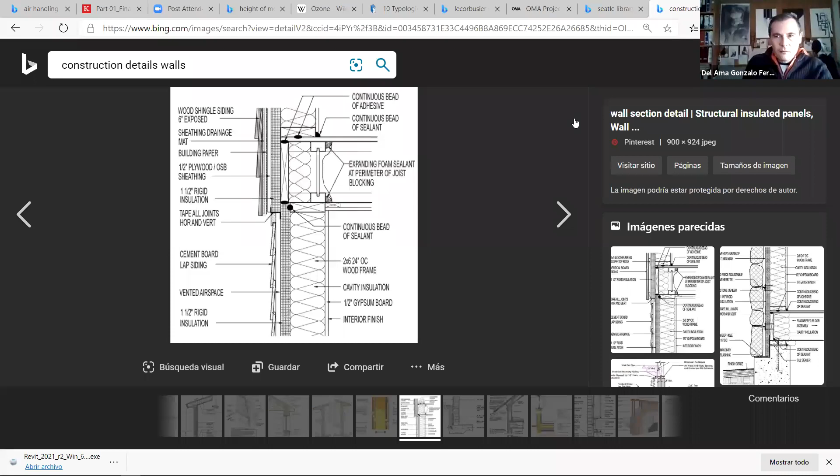You can find a lot of information, and most of the details that you can find on the internet are taken from this book, the Builder's Guide. It's called Climates.

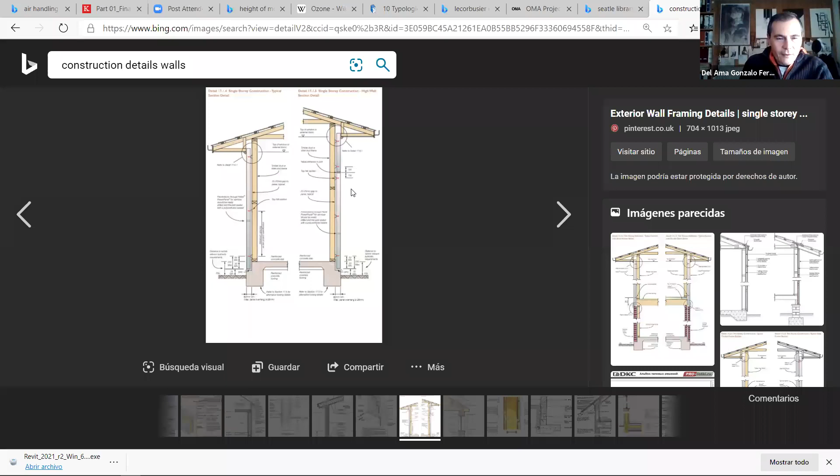Okay, but look at this. You can find a lot of examples, hand drawings, computer drawings. And if you have any questions, let me know, because this is how you will learn.

If you're working with your own building, you have to decide. It's your decision, not mine. It's not even your design instructor's decision what kind of materials you want to work with. It's up to you. So if you want to work with brick, that's fine. If you want to work with natural stone, that's fine. Wood, concrete, whatever. Then based on that decision, we need to analyze and calculate the U value and the R value and all that.

But especially the interior and the exterior finishes, they are up to you. So we are not making that decision for you.

Okay, so first we have the system. This is the system that we have studied, with rafters and thermal insulation in the middle. So those are the rafters. This is the kind of detail that we have studied on the first assignment, okay, that's fine.

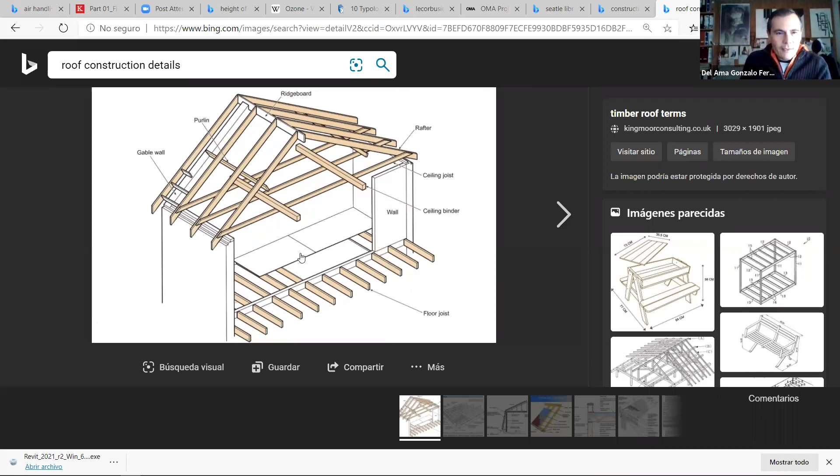Here we have the structural elements, and we need thermal insulation between these two structural elements, and then we need the internal finish and an external finish that usually we have shingles outside. So first we have to decide the system: do we want this, or do we want a flat roof?

If we want a flat roof, we have other options. We can work with concrete. This is more of a commercial building detail, so we have a lot of layers, but we always have a structural element, then thermal insulation, and then an external finish.

So if you have flat roofs, things can be different, because with flat roofs we have to get rid of water, and getting rid of water in flat roofs is complicated.

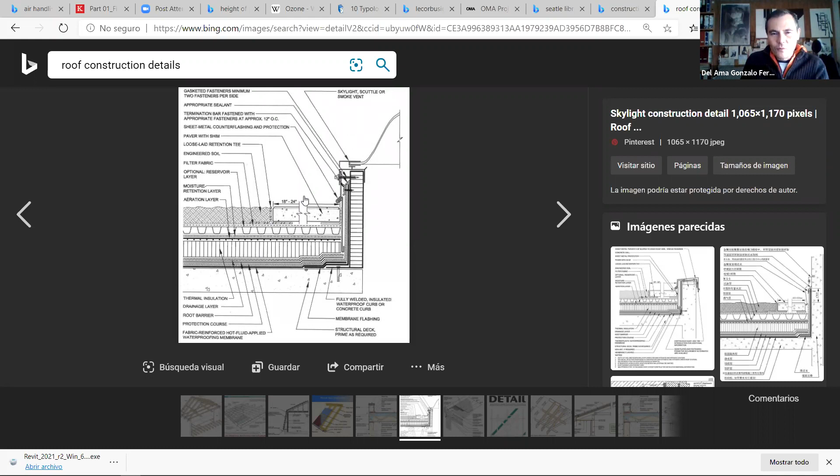But there are other options. Basically, if we are working with the same kind of detail, the roof is the same detail. We only need roof shingles, which can be metallic, ceramic, asphalt, whatever, but we need roof shingles. Then we need another rigid insulation, and then we need the thermal insulation where the rafter is, and then we need a gypsum board or interior finish.

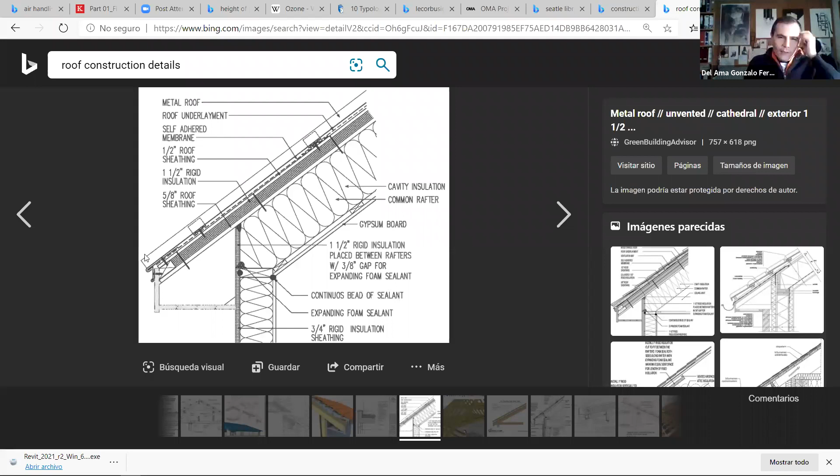Details of the roof and wall are quite similar if we're working with this kind of construction, or with other construction methods. If we're working with this framing, the details of walls and roofs differ slightly. This is a flat roof in which we have the beams or rafters, and then we have a board here.

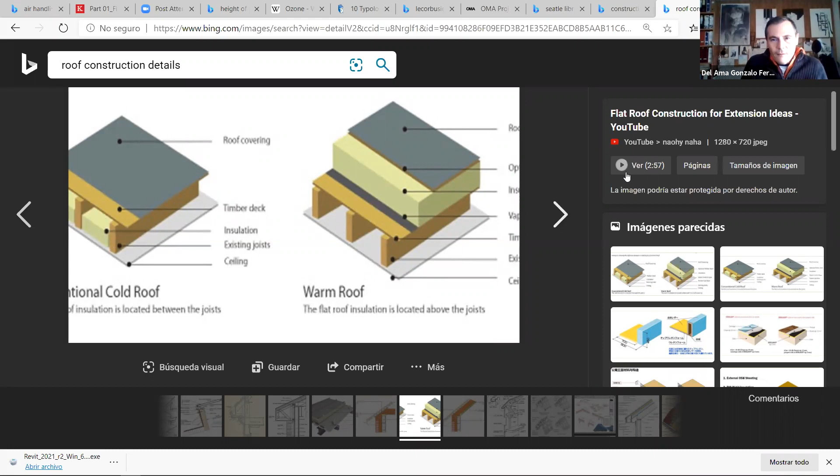We have thermal insulation above, and here we have thermal insulation between the rafters. My advice is that you should have thermal insulation between the rafters, and then add extra thermal insulation above to reduce the U value. As you can see, you have a lot of information here with nice drawings.

There's another option. If you don't want to do it by hand or using Revit, you can copy one of these and paste it on your project. If it fits your project, I will accept it. Here you have a lot of information, names, and nice hatches. So do your research, but it's always the same.

We have thermal insulation between rafters, then extra thermal insulation outdoors, and then siding or shingles. We can have air cavities or not, so it depends. But 80% of residential buildings have the same kind of construction detail.

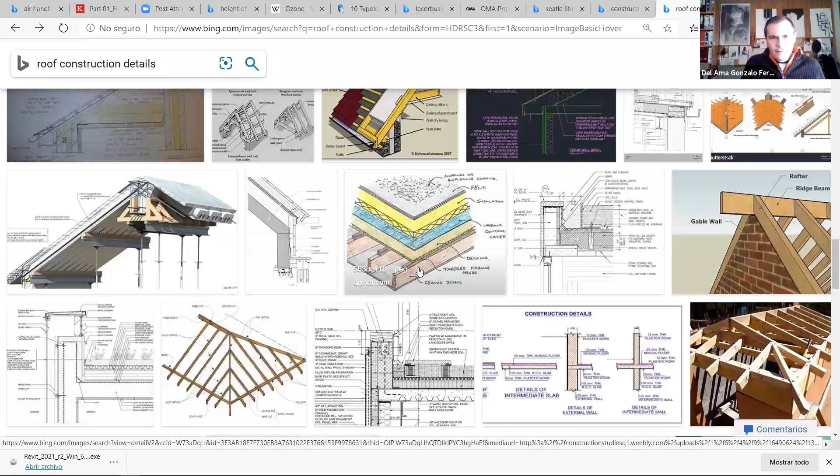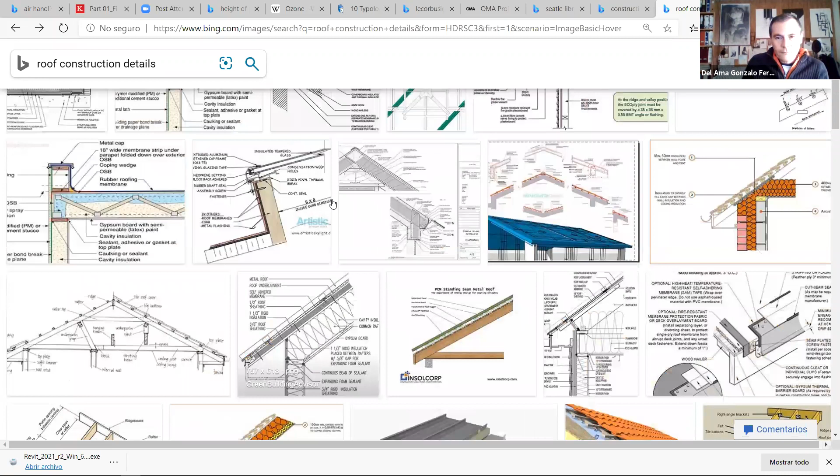When it comes to details, you can either use this Builder's Guide to Cold Climates. That's good because all the details in that book are correct. On the internet we can find good things, or things that are not as good as we expect. That's why I'm here, to help you decide and select the right detail.

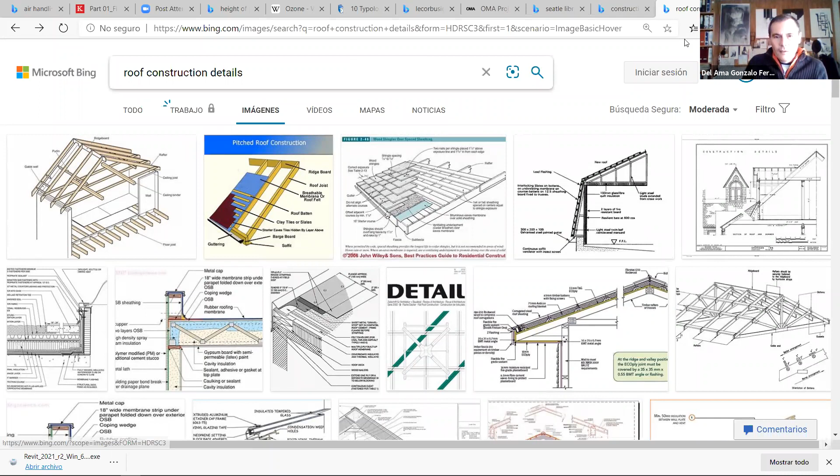So I was explaining part one: the first sketches of walls, roof, and basement. Again, the first sketch, then we will change it, but we have to start analyzing something, and it can be right or wrong. If it's wrong, we will change it. Doesn't matter. Finally, we need to calculate the U values of walls, roof, floors, basement, and windows.

So for windows, I told you that we might need to start this exercise with a window that is not a high performance window. If we want to do this... this is the Fisher house.

This is a detail taken from a basement. We've looked at walls and roofs, and now we look at the basement. I think it's a good option to have an insulated basement. There's an option to have thermal insulation only up to 1, 2, or 3 feet, but I think continuing this external rigid insulation is the best option for a basement. Then we have other things you probably don't know yet, like those drains, which we'll talk about later or in other courses.

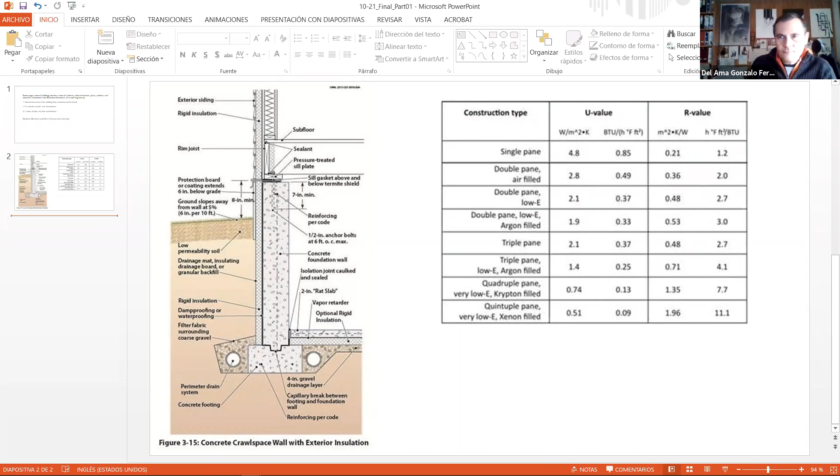So the U values of walls, roof, and windows. Yeah, let's move on.

For the windows, you can use that catalog. And for the roofs and walls, you can use something below R value 50, R50, and then we will move to something better to calculate the improvements, and then you will have to submit a PowerPoint file on Canvas by the due date, which is October 21st at 11 p.m.

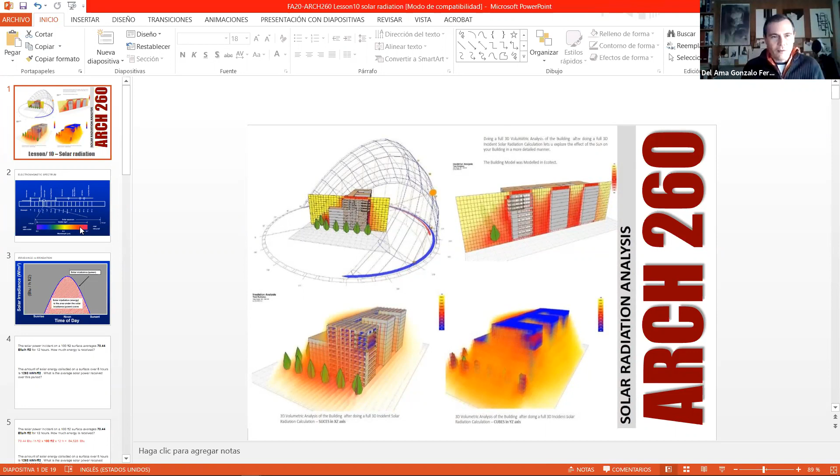I want to give a lesson on solar radiation analysis. Why? Because the sun is the source of energy that we have on Earth. It's for free, every day it rises and every day it sets. But we have to understand what solar radiation is, because it's probably the most important external source that we have. We have wind, we have water, but sun is probably the most important thing when it comes to the energy efficiency of the building.

So first we need to understand what solar radiation is. It's complicated, we're not physicists, we're not studying physics, but we have to understand that within the electromagnetic spectrum, the spectrum is a graphic that relates wave parameters to energy parameters. Here we are relating wavelength, which is a wave length, and we are relating the energy. It can be either power or energy or kilopower. So when we relate these two concepts, then we have a spectrum.

The electromagnetic spectrum is everything that we have around us and we don't see. What we can see is just the visible light spectrum, this narrow band of wavelengths. We can see from this wavelength until this one - this is the violet, and this is the red one. So we can see 7 colors.

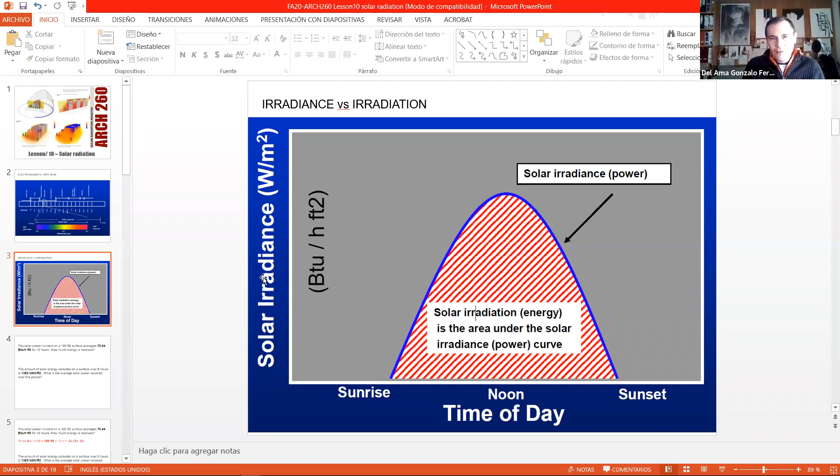This is just an exercise, so we're going to solve this—something I'm going to post as a test. Let me write it down. I'm going to post a test to make you calculate, or turn power into energy, or irradiance into solar irradiation.

Let's solve this. The solar power—so this is power, which means irradiance—incident on a 100 square foot surface. We have a square, 100 square feet, 10 by 10. The solar irradiance incident on that surface averages 70.44 BTU per hour per square foot. These are power units.

For 12 hours, so this is time. How much energy is received? Energy is power times time. So what is the energy? The units are BTU. What is the power? The power is 70.44 BTU per hour per square foot.

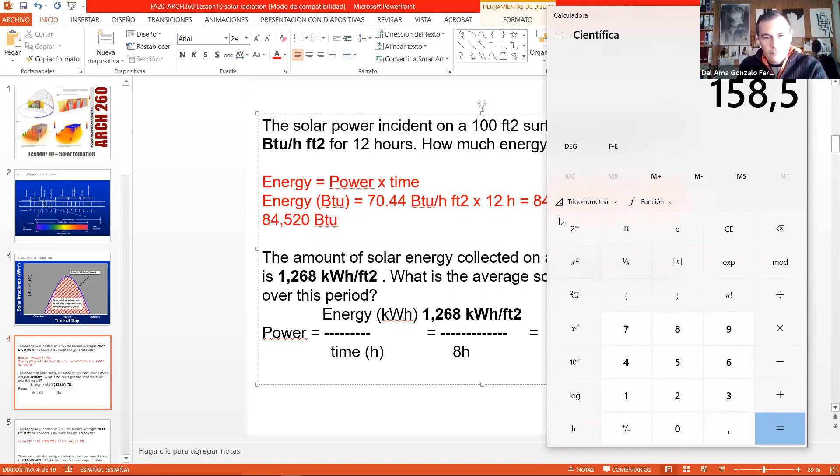Units, kilowatts per feet square. Okay, so here we don't have any information about the area, so we cannot multiply times area. So the units, the final units are kilowatts divided by feet square, and kilowatt is a unit of power because we are asking for the power.

Okay, so I think I told you on the first lesson that I recorded back in August, that if I had to decide what you have to know after taking this course, that should be the difference between energy and power. So we are repeating this many times, and we will repeat this next semester when you are taking either solar design or if you are taking systems. We will be dealing with energy and power because it's very important to understand the difference between energy and power and how we can go from energy to power and from power to energy.

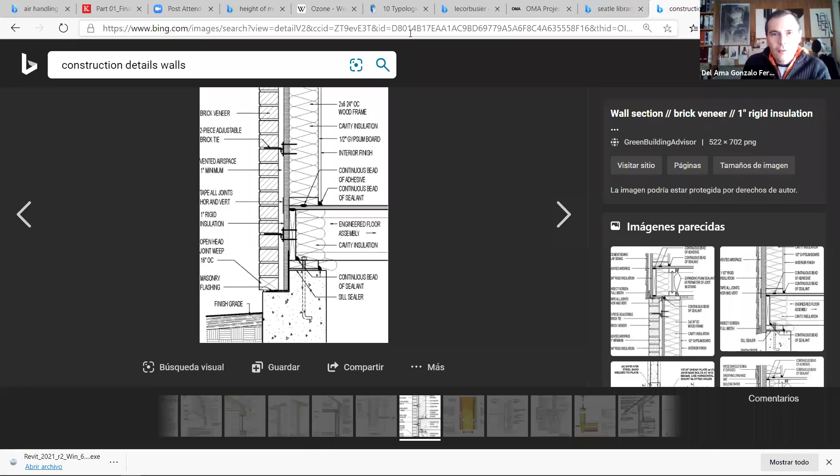So what's the thickness of this atmosphere? Well, so this thickness, it's around... well, that's a good question. So let's find out, what's the thickness of the atmosphere? 60 miles. Okay, 60 miles.

So this is the thickness of the atmosphere. But where can we live?

The layer of the atmosphere in which we can live - can we live on top of Mount Everest? We can't. We can't live here on top of Mount Everest. What is the height of Mount Everest? 5.5 miles. And we can't live here because we don't have enough oxygen. We cannot breathe without oxygen here. Well, maybe we can breathe, but only for a few times.

So the thickness of the layer in which human beings can live, maybe it's 2 miles. Okay, so we can live in this narrow layer with air and other gases that we can breathe. Other than that, human beings cannot live there. Okay, so think about it.

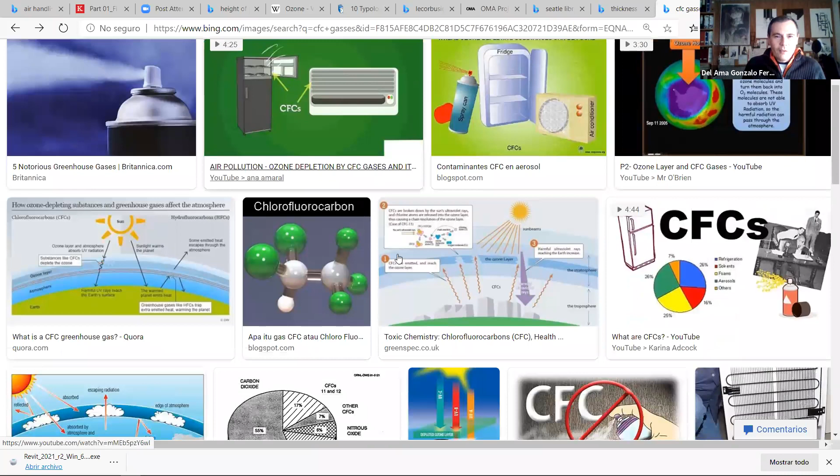So by releasing these kinds of gases to the atmosphere, they started causing trouble with this. There was this break or breach in the ozone layer, so the amount of ultraviolet radiation increased at the time.

What were the consequences? The hairspray was forbidden - I think it was a good idea. And secondly, these CFC gases in air conditioning systems were forbidden as well. Mechanical engineers had to come up with other gases that are less harmful to the atmosphere. But that happened in the 80s.

Now we have other issues, like global warming. Well, everything is related, but why is that happening? Well, first we have this ozone - we need this to absorb part of the ultraviolet solar radiation.

Okay, that's fine. Then we need clouds. So when we have clouds, the clouds are water vapor - something natural - and it absorbs part of the infrared solar radiation. So by having water vapor in the atmosphere, sometimes we see these water vapors as clouds or fog, so we can see that.

But even if we don't realize that there is water vapor, there is, and it absorbs part of this infrared radiation. If we didn't have water vapor, a lot of infrared radiation would end up hitting the Earth's surface, and that wouldn't be good.

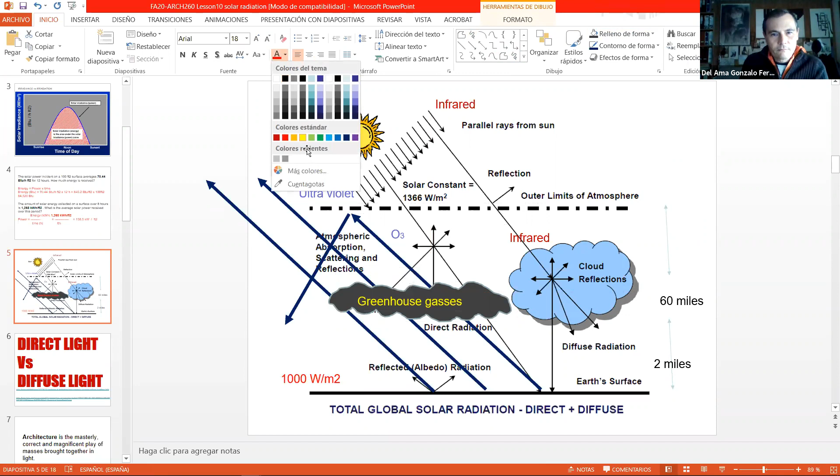These greenhouse gases are good because they help us. They are responsible for reflecting part of this albedo. We need a certain amount of these greenhouse gases so that radiation is reflected back, and the temperature is quite good.

But if we increase the proportion of these greenhouse gases, then a lot of radiation will be re-radiated here. This is what's going on now, and this is global warming. Naturally we wouldn't have this amount of greenhouse gases in the atmosphere, we have only the right amount. But if we increase this proportion, this energy is not released to the atmosphere, it's re-radiated, and then we have global warming.

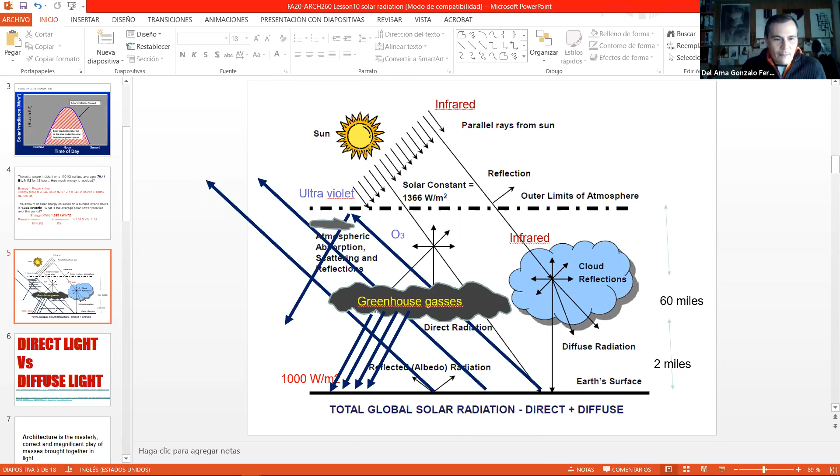Does it happen? It happens. I can show you a picture of where I live, where I used to live when I was in Spain. There you go. You can see that especially in big cities, we have this. What is this? Well, it's a concentration of these greenhouse gases, especially when the wind is not moving, when it doesn't rain, when the heating systems are on.

There are a lot of cars here, so we increase the proportion of these greenhouse gases. This is something we can see if we walk out of the city and look at it from afar - we can see that something's going on. So this is what's happening. And can we prevent this from happening?

Of course we can. As human beings, we can use less fossil fuels. By burning fossil fuels, we're increasing the concentration of greenhouse gases in the atmosphere. But as architects, we have a huge responsibility, because they say that 40%, so let me copy this.

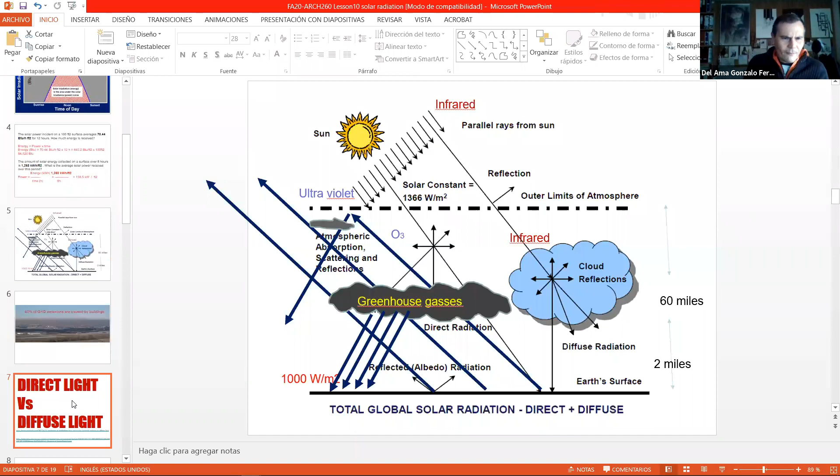But those are concerns that we need to be aware of. I want to point out other things that affect architects, and probably not other people, maybe artists or people who take pictures, that especially affect architects: the quality of light. We are talking about light or solar radiation from the thermal or energy point of view, but we have other points of view, and they are relevant to architects.

Okay, I'm going to paste this on the browser, because I was preparing something about this, and I found this website, ArchDaily. It's a good one, you can look at a lot of projects. They have products you can download, they have news, and you can upload your own projects if you are proud of them and they are good enough, they will be posted here. I found these interesting articles on 10 typologies of daylighting, from expressive dynamic patterns to diffuse light. Ten typologies, why ten? Well, the number ten is cool, that's why everybody has ten commandments and ten of everything. We have ten typologies of daylighting.

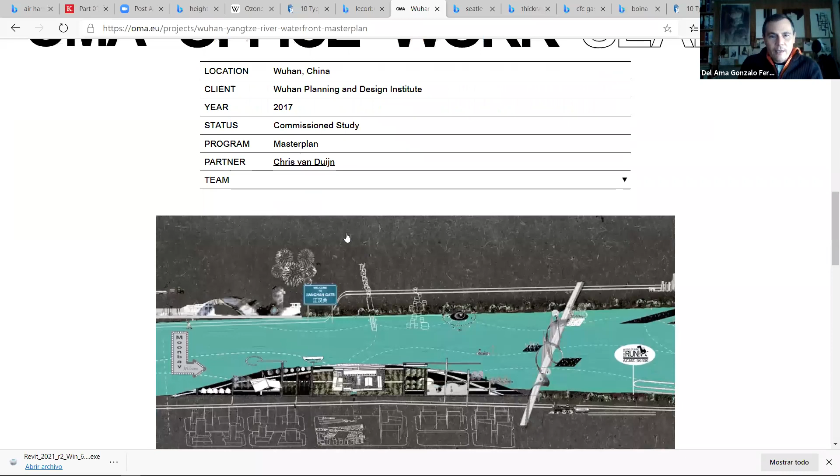You have first a nice picture, so this is what the cover page is. Look at this presentation, if you want to present your work what do you need? The best picture on the cover page. Or if you are designing a website, you need the best picture here. And then you have information, the location, interesting, the client, the year, whatever. Then you have other pictures that maybe are not as relevant as those, but the best picture is up front.

Beautiful. Okay, but we're not here to, well, we can.

Who's behind this OMA office? His name is Rem Koolhaas. The guy. Well, when I was a student, he was like this, but I think nowadays he has lost a lot of weight. Anyway, Rem Koolhaas is probably the most, in Europe, everybody's crazy about this. So every single European architecture student wants to work for that firm, even for free. He's in the Netherlands, and there are a lot of architects that go there asking, please, can you hire me for a year or 3 months or whatever? I don't want to get paid, but I want to work for you. And he says, okay, sure, you can go ahead. Anyway, a great architect and an interesting guy.

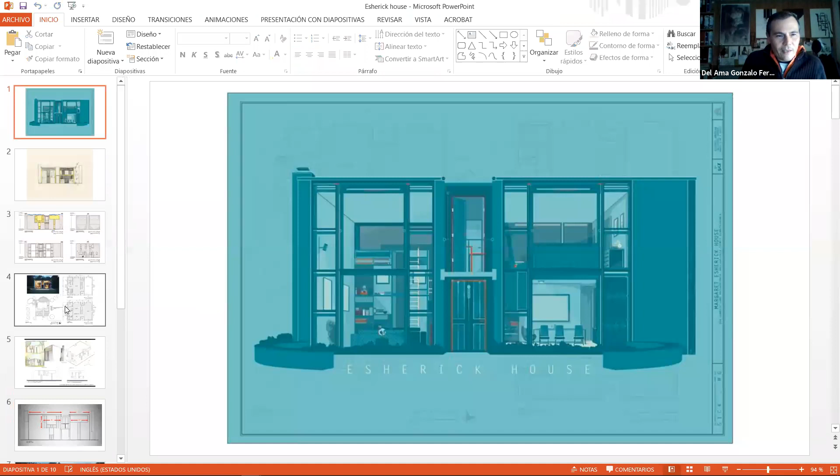Well, interesting. If you look at this guy, Libeskind. There's a museum in Berlin. So his option is this kind of openings. They are not windows, they are like cracks in this volume. Why? Well, we need to know about this museum, what the idea behind it is. But I think he has decided on this kind of light.

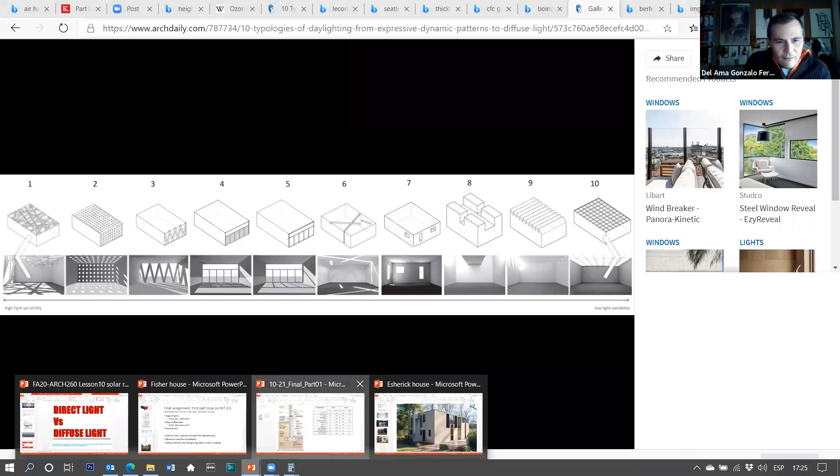And if you don't have enough, I want to show you this. Okay, this was my teacher. Well, this is my teacher's work. Let me see if he has a picture. Yes, this guy. Huh. What are you laughing at? Anyway, he used to be my teacher, and it's interesting because he's making the most of this. He's decided what kind of light he wants in that space, and then he does it.

I think he literally translates the options that we have seen here. In this picture I'm showing you, it's the first option. They have this dramatic daylight that is changing throughout the day in that space. This is a lobby, so I think that goes well for a lobby. But in other buildings, we might need something different.

Let me see. Okay, for example, this one. If you are designing a sports facility, you want kind of a diffuse light. You don't need this dramatic light, because if you are playing basketball, you don't need contrast between lights and shadows, because it's disturbing. So you will need that kind of diffuse light. And I think he has a sports facility.

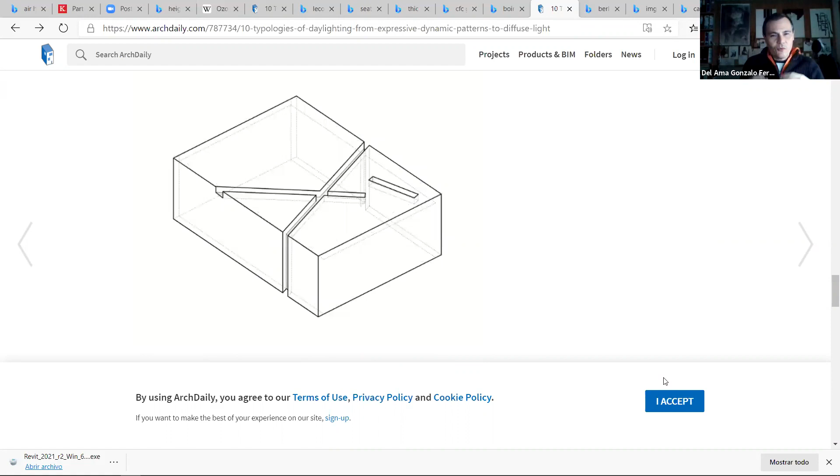Once we have made our decision about the kind of light, the quality of light we are using, then we can start calculating the thermal and energy parameters of light. But we have to connect our idea to the energy performance of the building.

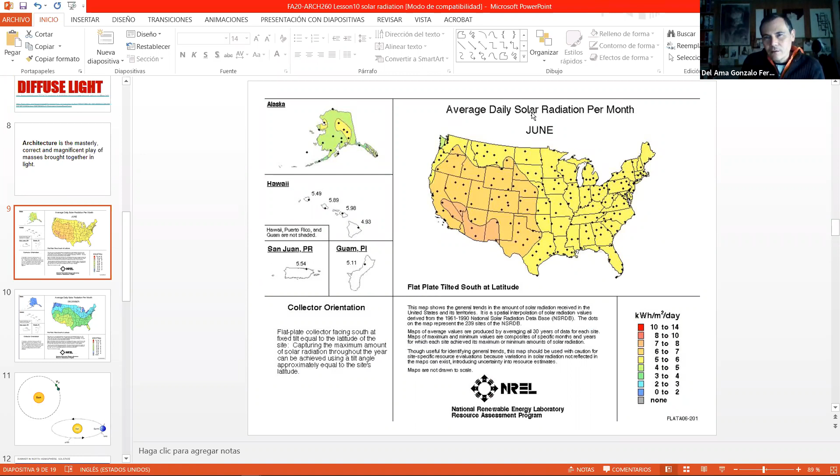By looking at this data, we can understand where we are. And when we understand where we are and the use of our building, then we can make a decision about the quality of light we need.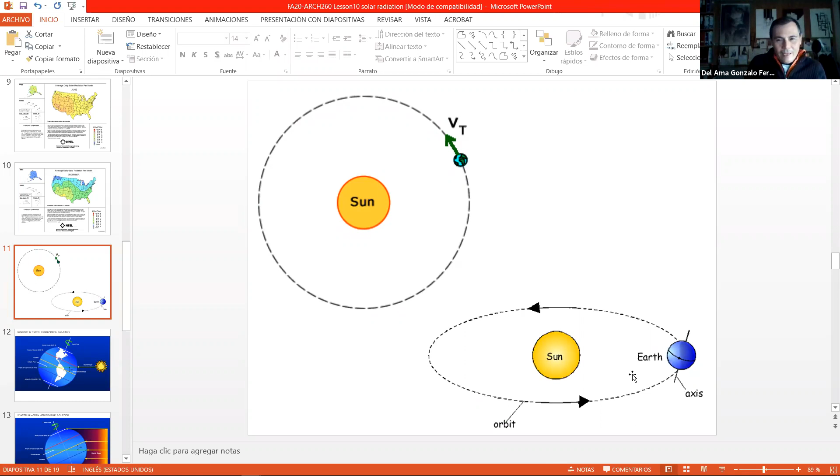What makes the difference is the angle. This is what we have to understand today. If this is the orbit in which the earth is revolving around the sun, this horizontal plane, the north-to-south angle, is tilted here, and this angle is 23.5 degrees.

Okay, so this is what we call the solar declination or the ecliptic angle. By the way, the ecliptic is this plane here, so this horizontal plane is the ecliptic, the plane in which the earth is moving around the sun.

This is not parallel to the equator. So this is the equator, and we have this angle of 23.5 degrees. Okay, so we need to know that.

And by the way, this angle, I think, is moving very little every 10,000 years, so we don't notice that in our life. But in millions of years, the earth will be upside down, and I don't know what will happen. But this is not something we can control. We can control the greenhouse gas emissions, but we can't control the tilt of this axis.

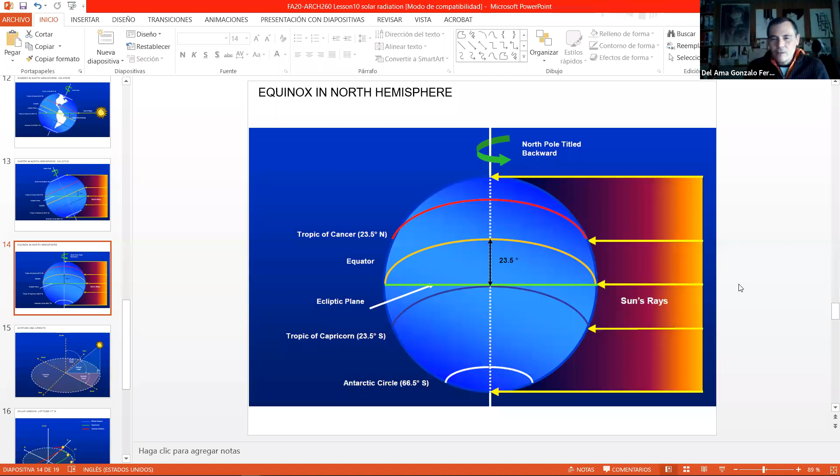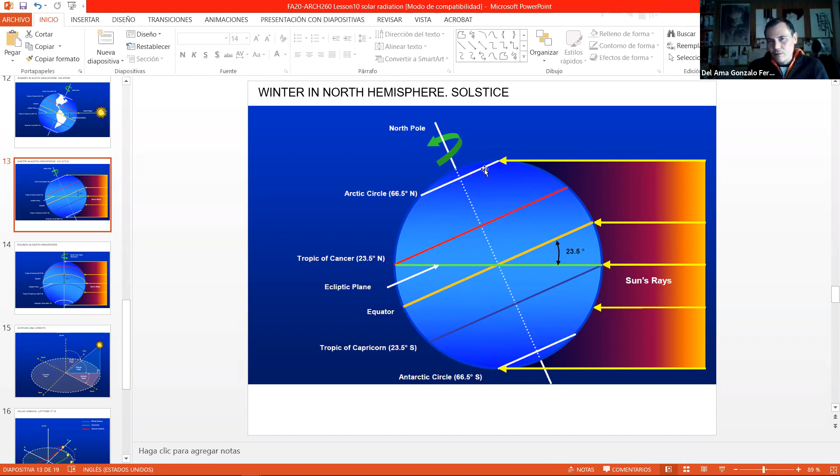There is a moment in which we have the same amount of solar radiation on the north and south hemispheres - this is the equinox. That happens on March 21st and September 21st. The solstice happens on December 21st, which is winter in the north, and on June 21st, which is summer in the north.

And then we need to know the azimuth. The azimuth is the angle between this north to south line. The altitude angle is the angle of the sun on the sky.

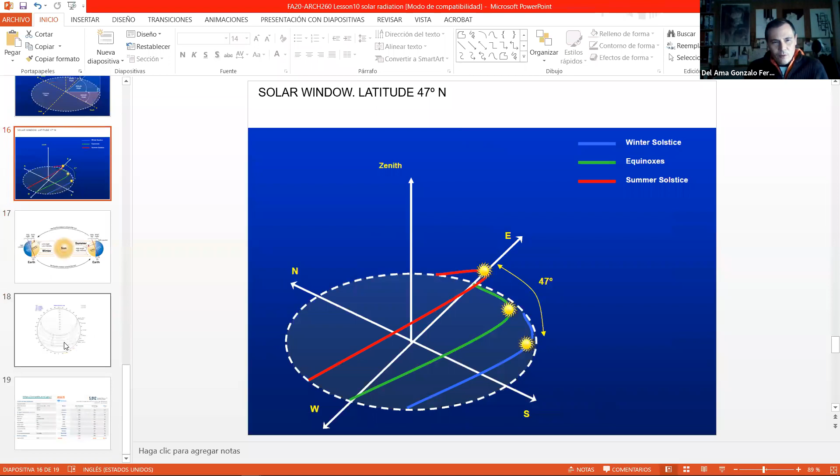If we look at this, this is the plan. Here we can see - I think I showed you that in Revit last week - how in summer we have this sun path, and in winter we have this sun path.

Only on September 21st or March 21st does the sun rise in the east and set in the west. In summer, the sun rises in the northeast and sets in the northwest. In winter, the sun rises in the southeast and sets in the southwest.

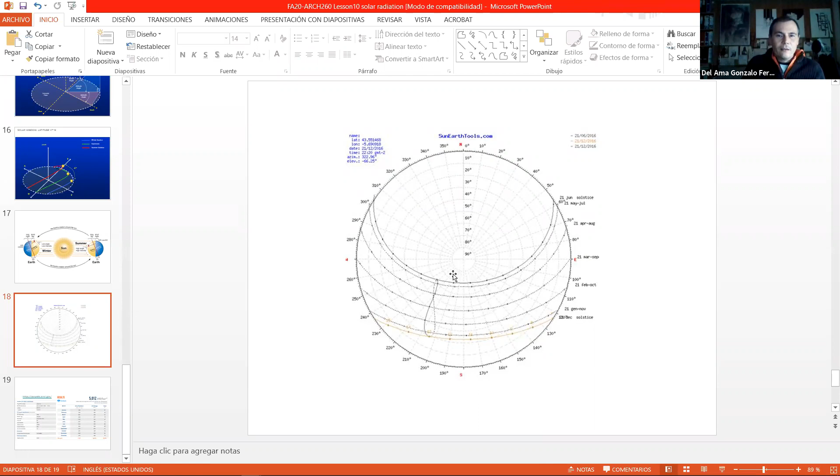That's important, but now we have software, so we don't have to worry about this - we can just model our building with Revit or SketchUp or whatever, and say, what's the daylight on February 3rd? Click, and you have the sun path and all the sunlight on that specific date at a specific location. That's great. And finally, we have PV Watts.

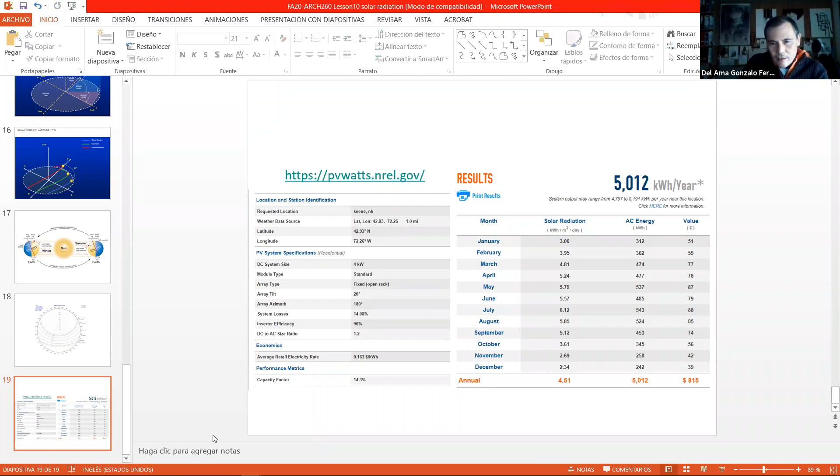That's the tool that we are going to use to calculate all these kinds of things. I'm going to check if PV Watts is working, because early in the morning it wasn't working.

Keene, New Hampshire.

Okay, now it works. A few hours ago, it wasn't working.

As I told you before, we are familiar with this software, and we have to work with the tilt - this is the angle of the wall. So 0, it's a flat surface; 90, it's a vertical surface. And this is the azimuth, which is the angle between the surface we're analyzing and the north to south axis.

Those are PV parameters, because this is to calculate the photovoltaic energy that we can get from the sun. We will start explaining this next Monday, but by Wednesday, I want you to...

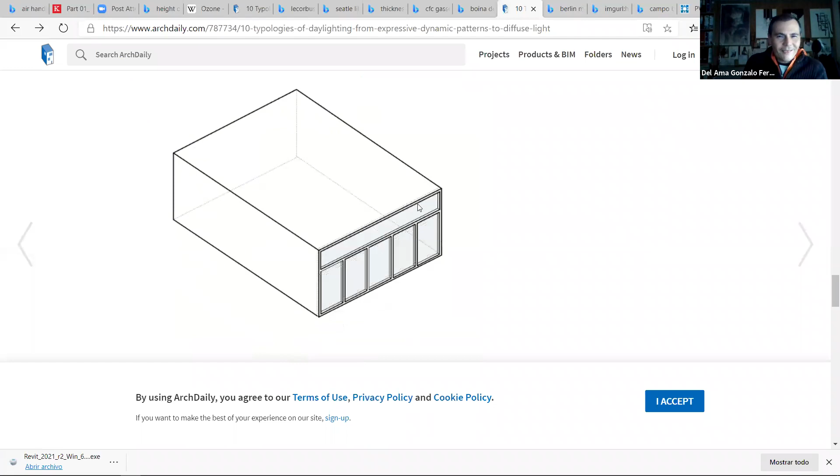...decide on this. And if you have your project, if you can show me pictures of your project, probably I can start asking you about this, what you want. So what kind of idea do you have for the sunlight? That depends on the use of the space, I told you, and it depends on where we are - so it depends on the orientation of the building.